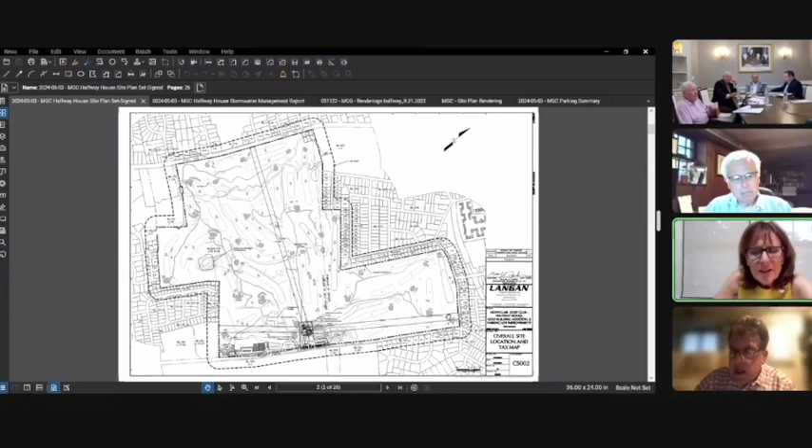Ms. McGovern, you have to label this? I'm sorry, Ms. McGovern, you have to label this? Well, if it's with the application package, no, but I think each page that you're referring to, like this one, it's very hard to read. It's small on my computer. You said this was from the previous site. Yeah, just please refer to the page number on the site plan. So this is CS002. As you're testifying to each page, reference the page number.

Sure, this is drawing CS 002, what we call the overall site location and tax map. Just to get some bearings, Prospect Avenue is on the bottom of the page. All the improvements are along Prospect Avenue. The existing clubhouse is in this area. The new pool is further down to the south, nearest the Residence Inn. The existing pool is located next to the clubhouse.

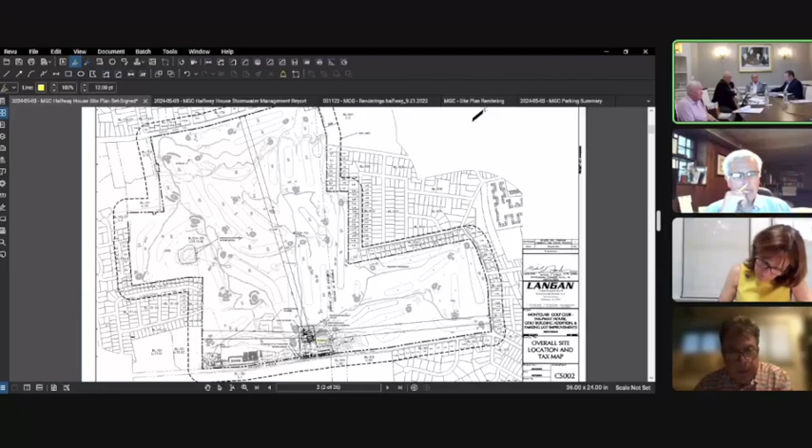So all the work is here, but I'm going to move on to our overall site plan, which is drawing CS 101 with the same revision date. This is a zoom in, more of the same area, but as you see, the clubhouse is here. The existing pool, just for perspective, is approximately where that yellow box is. And we are, I'm going to go, I apologize.

I'm going to go to a zoomed in site plan to make it a little clearer. This is drawing CS 102, showing the improvements in the area of the existing pool.

The existing pool is located here, and there's an existing building that's located here and includes the pro shop here. This part of the building will be demolished. It currently houses a locker room and snack bar that are no longer in use. The pool is currently filled in for safety reasons, but it will be demolished as part of the project.

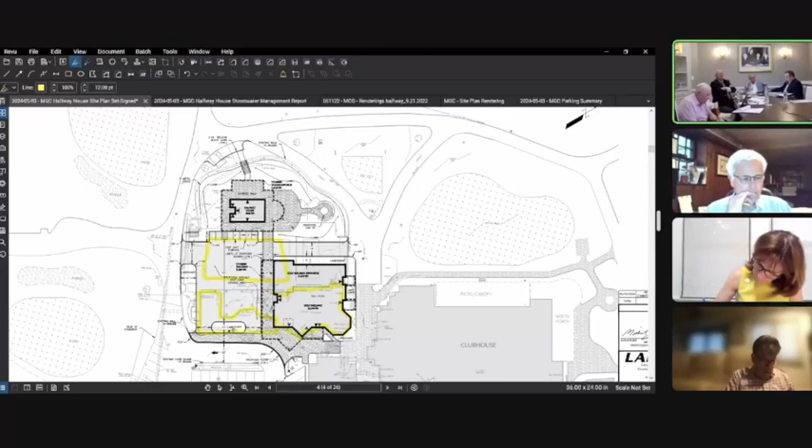The project in this area includes expanding the pro shop, the golf building, which houses the pro shop, golf bag storage, the starter area, and in the future will hold two hitting bays or golf simulators. Additionally, they're proposing to build a golf cart staging area. Currently, golf carts are staged within the drive aisles in front of this existing building and to the side of the building. By eliminating this and building a golf cart staging area, it allows better free flow of traffic and drop off within the parking lot as is intended.

The halfway house, which is being proposed here, will house a kitchen and bathrooms for use by golfers in the middle of the round and after the round. The remaining work we're proposing is within the parking lot.

Along Prospect Avenue, we're looking to maintain the three existing driveways while expanding the furthest south driveway, which is currently one in and one out. We are looking to add dedicated left turn and right turn lanes. As we do that, we will also look to eliminate some parking that's currently immediately adjacent to that entrance to allow for better flow into the golf facility and also south towards the pool.

The improvements will also include curbing along Prospect Avenue with the county, and a 3-foot high decorative wall for aesthetic purposes. As we eliminate some parking here, we're proposing 15 new parking spaces here. There'll be a net 4 additional parking spaces. We currently have 385 parking spaces on site, and we're proposing 389.

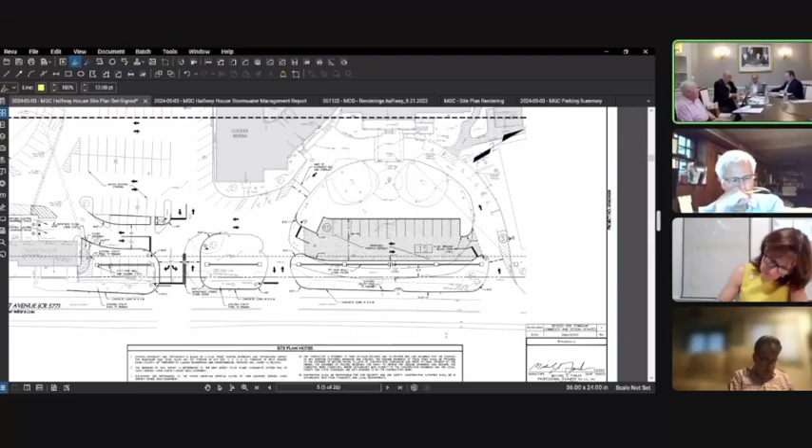There will be no changes to the ADA parking on site; existing spaces are to remain. There's one existing EV parking space, and we're proposing to add a second. Generally, that's the extent of our site improvements.

Tim, before you move on, you might want to go back to the prior plan. I don't know if you have this dimensioned on the plan, but if you could at least give the board an approximation as to how far the existing golf building is from Prospect Avenue. That's probably best shown on our overall site plan.

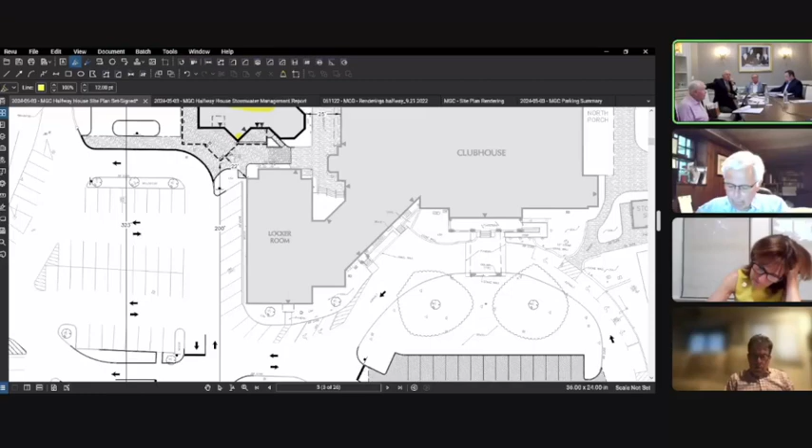The existing building is approximately 210 feet from Prospect Avenue. The new building, with an overhang here, will be 200 feet from Prospect Avenue. And the halfway house will be 323 feet from Prospect Avenue. Okay, thank you.

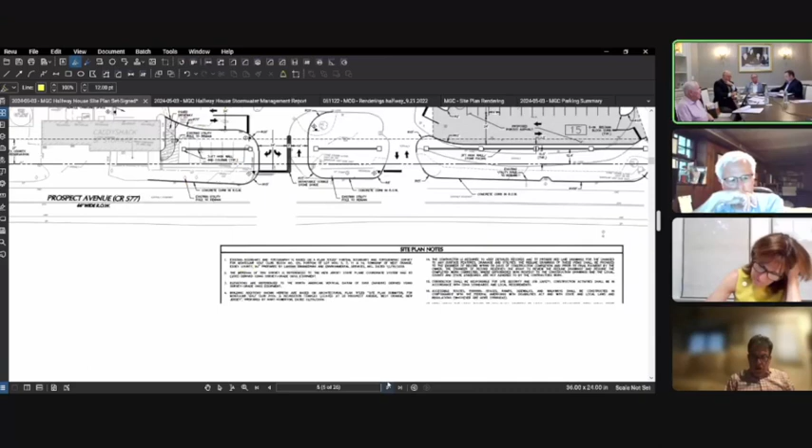The remaining improvements have to do with the required utilities, grading, drainage, and lighting improvements. This is our overall grading and drainage plan, drawing CG 101.

Grades are generally to remain as existing. The project disturbs greater than an acre, so it is a major development by stormwater management rules and by your code. To address that, we are providing underground detention ultimately within the golf course area, and porous pavement at the front within the new parking spaces. The porous pavement discharges to the county system, which ultimately discharges into Eagle Rock Reservation.

The other area, the area to the golf course, discharges to an internal drainage system that ultimately discharges to Peckman River, greater than 2,000 feet away.

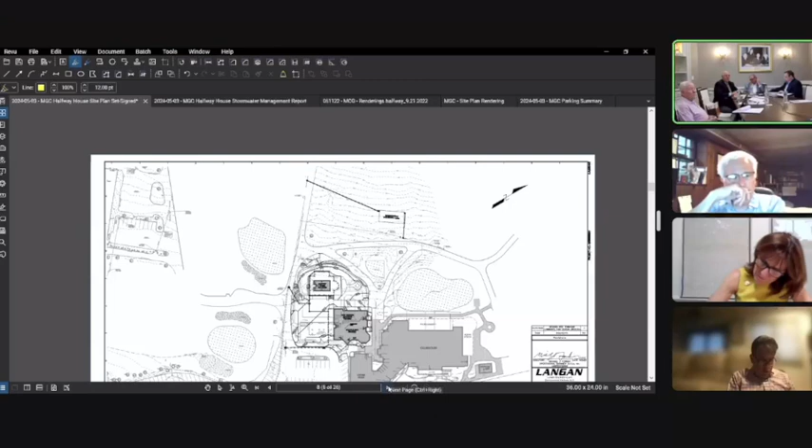Moving to the utilities, existing sanitary is provided by reuse of an existing sanitary lateral that previously served the pool facility. Gas will be provided by the existing gas service that was also to the pool facility. Electric, power, and communications are provided through the existing golf course building service.

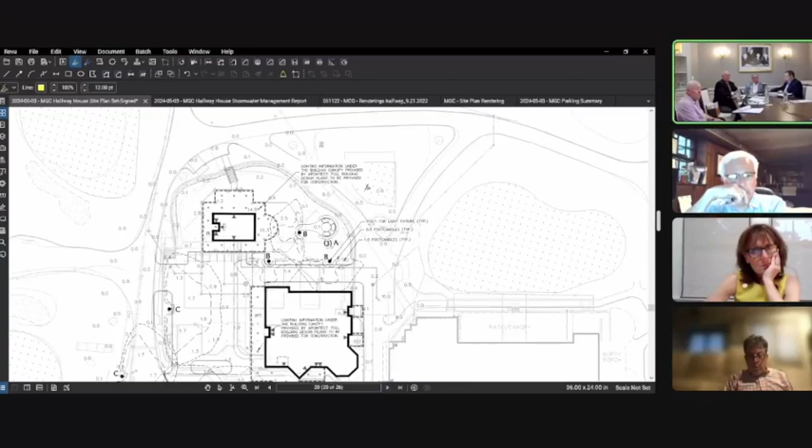For the site improvements, we're proposing new lighting within the project area, where it's currently lit by floodlights and some existing building lighting. The points here depict new pole lighting. This is drawing LL 101, the overall lighting plan. There'll be new decorative pole-mounted fixtures matching what was previously installed for the pool facility a few years ago. There will also be some decorative lighting on top of the walls at the entrances along Prospect Avenue.

And then additionally, the last set of improvements we're proposing have to do with landscaping, and that's shown on our landscape plans. This is the overall landscape plan, LP 101.

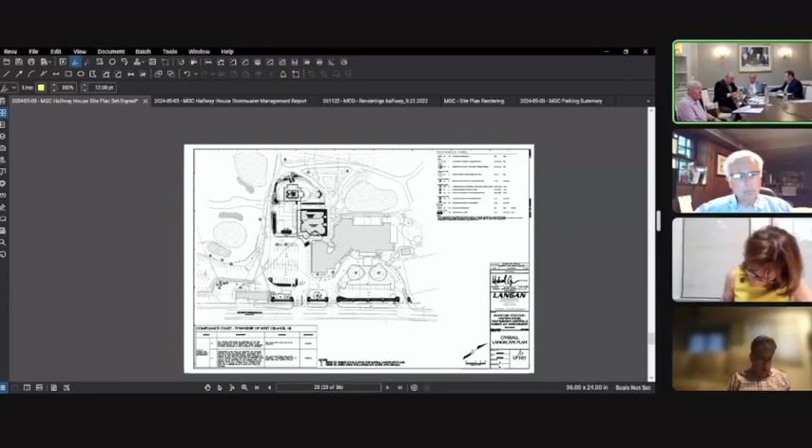As you can see, we're proposing landscaping along the decorative wall on Prospect Avenue. There's several trees and other low landscaping around the proposed buildings.

As part of the project, we will be removing one tree as requested in the engineer's letter. It's an ash tree that's in poor health, located on this island. Other than that, there are no other tree removals proposed as part of this project.

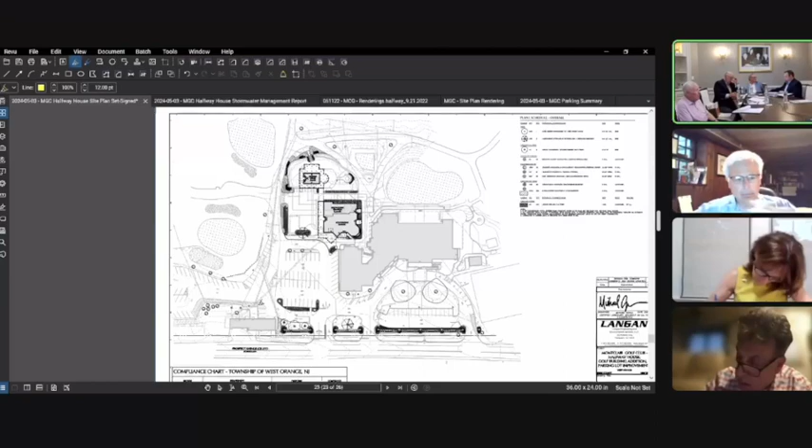Looking back at our overall site plan, CS 101, there was a question about stacking and cars interfering with traffic flow in the area of the entrance and exit. I just want to point out that this is an existing parking lot that has been functioning this way for greater than 50 years, closer probably to 100 years with the driveways in place. What we're doing is improving what currently exists. These are generally private members using this facility and used to the traffic as is.

As I said, there's existing parking in this area, and existing parking in this area, and currently only one way in and out. So as it is, cars do just line up here and block traffic. By eliminating the parking here and here, there's room for cars to wait here and wait at this intersection, and also room for right turns to be made while left turns are waiting.

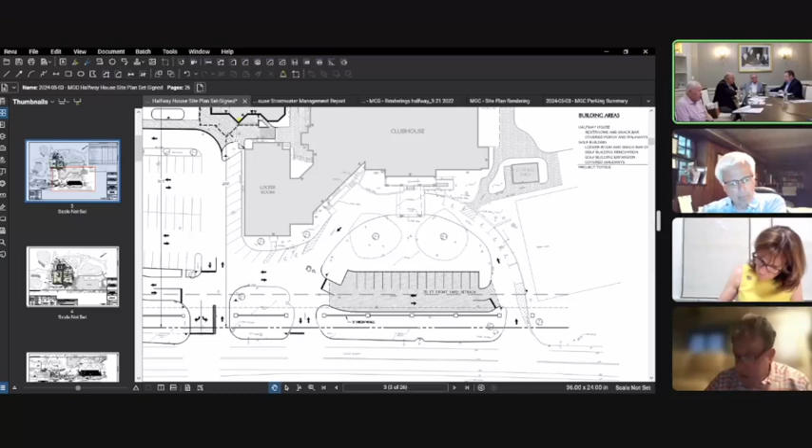Montclair Golf Club, to my knowledge, has always been a private golf club. Is that right? Correct. Is there any intention to change that going forward? Not to my knowledge. The club will continue to operate as a private club and not be open to the general public, but simply to members and their guests. Is that right? Correct, I believe no change in current use. I just mentioned that because there was a comment in one of the review letters we received.

I think my final question was, did you have an opportunity to review the updated comment letter from John Hess, the board's engineer, dated June 4, 2024? Yes, I have. Is there anything in that report you'd like to discuss, or are you able to commit to complying with all of his comments? I believe we can comply with all his comments, or come to an understanding or agreement if there is a discrepancy. All right, thank you, that's all I have, Mr. Chairman.

Do any members of the board have any questions? Vice Chairman Garino. Thank you, Mr. Chairman. I have a question for Mr. Derrick. Are you qualified to give testimony or answer a question concerning traffic and traffic evaluation? Very limited. Well then, just from your drawings and everything else, I have a concern about the privacy walls.

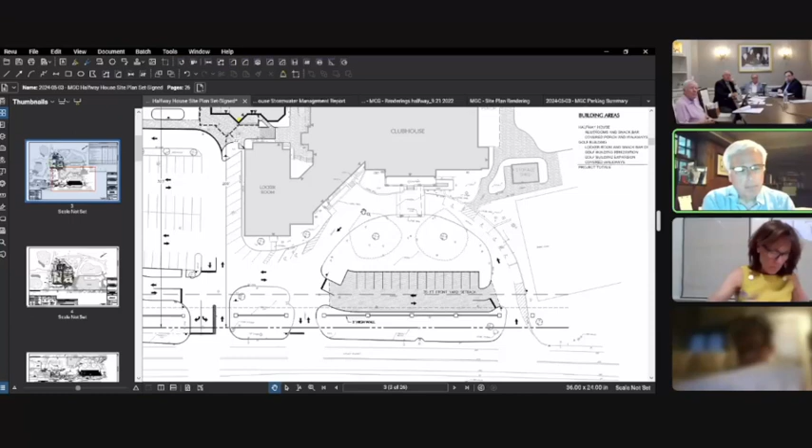Has any analysis been done on any increased inability for people exiting the property to see traffic coming across Prospect? As part of our plan set, we have a drawing submitted, CS104, the sight triangles plan. It demonstrates the visibility for traffic exiting from the driveways.

And just to point out that the walls are well behind the stop bars, so they're not interfering with any views. Okay, and the lighting that you propose, has that been analyzed to figure will it make any glaring on the drivers coming out of the property that would impede their seeing ongoing traffic on Prospect?

I'm sorry, the proposed light, the lighting that you say you're going to put on top of the walls, are they all LED? I won't say house side shields, but they're directional and won't be directed towards the road. And our light level plan demonstrates the light levels within the area of the project.

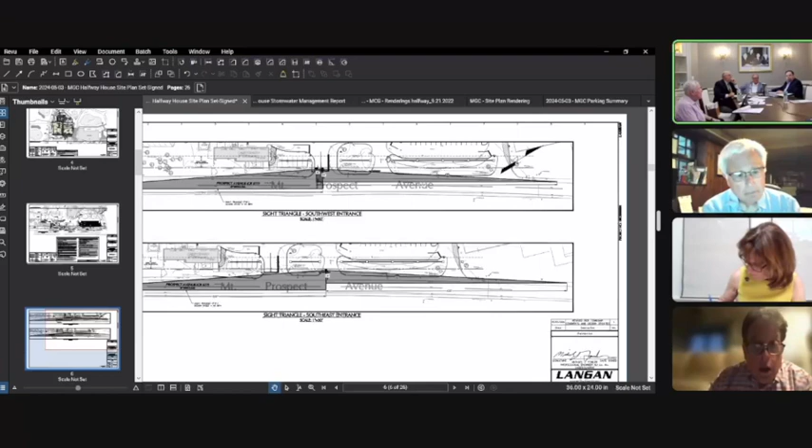Okay, and I need to ask, was a traffic engineer utilized to look at this and give their expert opinion as to the traffic and the flow? No, not specifically. Not changing, no. We're maintaining what's there with some improvements.

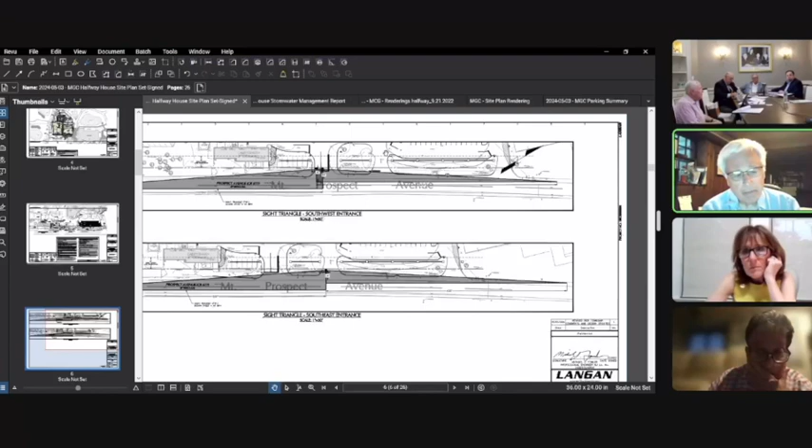And my last question, sir, is there any intention to put any sidewalks in front of the property here that do not exist now? Would there be any intention of adding, repairing, or putting in additional sidewalks? Currently that's not part of this project, and I believe that would be something the county would have to propose. But that said, there's nothing in the area of the project to connect to, so no, we were not proposing any new sidewalks.

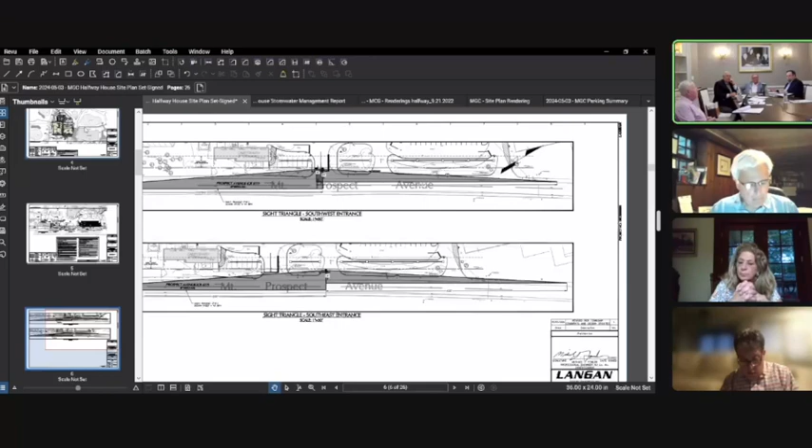I don't know if I can speak to hazardous trees. As the engineer, I can't really speak to it, but from past hearings, I understand if there's any hazardous trees on the golf club property, the golf club would typically be willing to address the matter.

You know what? Can I stop you? Who's talking? Is it Mr. Tremolak or is it a witness that hasn't been sworn in yet? No, it's Mr. Derrick. Okay, because I'm having a hard time. I see a group of people and then I don't see it because of this screen sharing. I can't see him. I apologize. Okay, that's alright. Because you're on mute on my screen, but yet you're in that room with them. Is that what's going on? Correct. Okay, got it. Sorry, I apologize for the confusion.

But thank you for answering the question about the hazardous trees. So you may have to bring that to your attention.

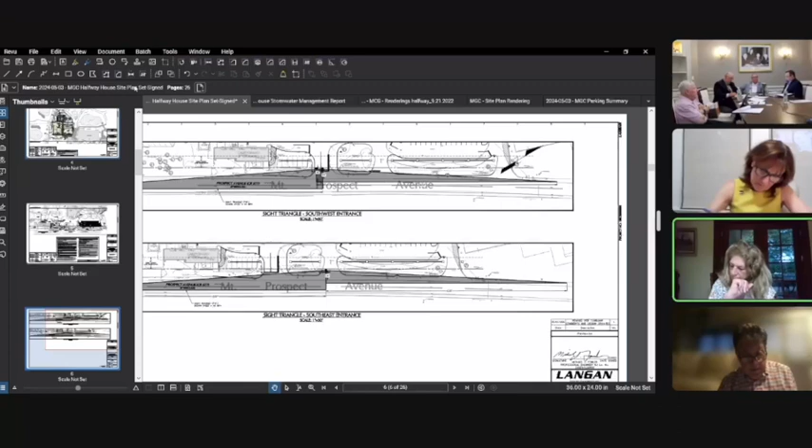Any other questions, Mayor? No, sir. Thank you. Mr. Klein? I was part of the SPRAB, so I think they addressed my comment on the entrance because they're reconfiguring it slightly, but I think they've got enough stop lines and stop signs to control the traffic at that T intersection. It's actually more like a four-way intersection. So I'm okay with that.

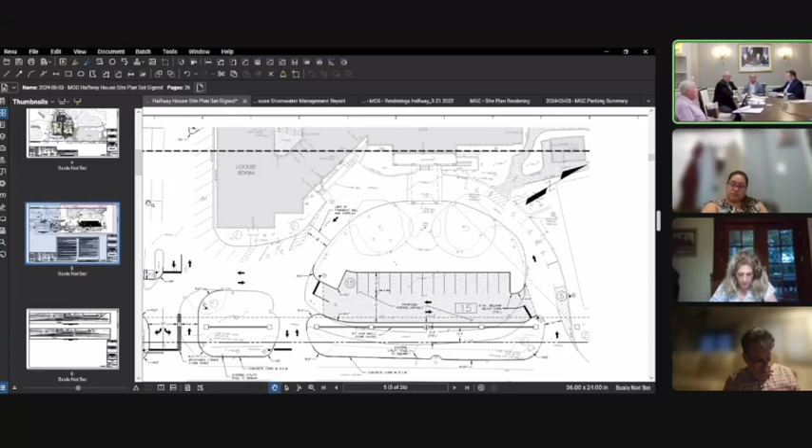The existing ADA parking for this area is located along the turnaround in this location, and the entrance to the clubhouse is right here underneath the porte cochere. There's an ADA ramp that was installed roughly 10, 15 years ago as part of another site plan application that people can use. Additionally, there's another ADA path out to some of the patio areas that can also be accessed from these ADA parking spaces. The two ADA parking spaces here, users would walk up the driveway to use the same ADA ramp. People parking here would likely walk out and, using the drive aisles, walk up to the clubhouse or to the golf areas, similar to how all the rest of the parking facility is used.

Have there been any issues with those who've been using the handicap accessible spaces? The concern I have is a bit with people walking in the drive aisles, especially the access drive. Have there been any complaints or issues with that to your knowledge? Nothing that's been brought to my attention.

Okay, thank you. I have one question about stormwater management as well. Did you complete a geotechnical report as part of, I think you said you're proposing, it says this on the plan, the porous asphalt out front? We've begun an investigation, and we'll provide the results to the town shortly, and if there's any changes required, we will make them. But the initial results we have fall in line with the assumptions we've made. Okay, thank you, those are the only questions I had.

I have a question. Would it change the plan drastically if you put a sidewalk along Prospect Avenue? Would that change the places where you have the new parking spots? No, not that I believe so. The property line is here. The county does have a reservation line, which is the dash line, but they've allowed us to do work within that reservation line. If they did need to put a sidewalk in, there is room to put a sidewalk in.

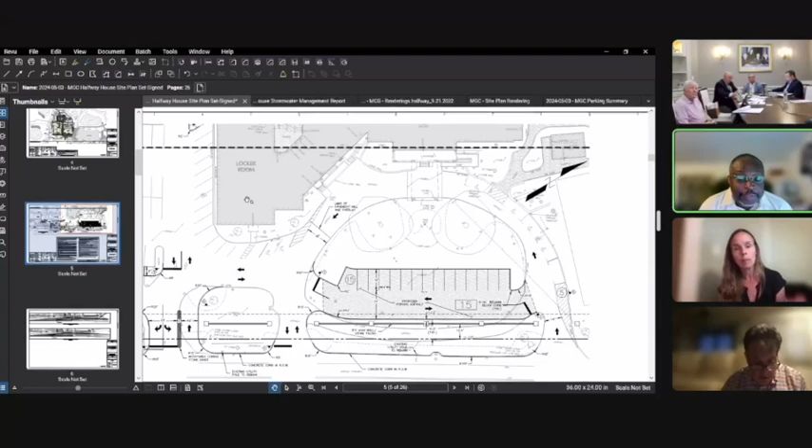Okay, thank you. Mr. Hazel, do you have any questions? Yes, I do. You mentioned the circulation on the site and went through the different stop areas, and so that would help to prevent excessive stacking. Were you able to take a look at my report and the consideration I mentioned, and would you consider it in terms of the circulation on the site?

I did see your report. The hesitation we have for making this drive aisle a one-way is that we're trying not to introduce additional traffic underneath the porte cochere where people are being dropped off typically. So if someone's parking here, we want to give them the option to get out without having to go underneath the porte cochere. That was the consideration we made.

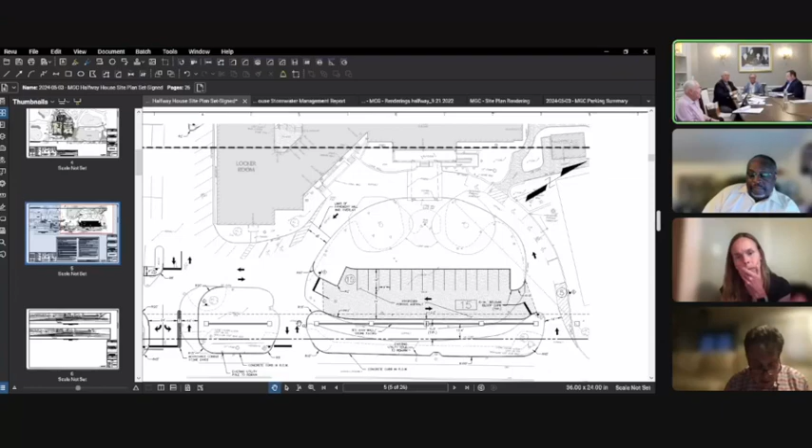And then additionally, I think you had some comments about this middle driveway here. Yeah, typically the majority of the traffic comes through this driveway, the southernmost driveway. This driveway is typically used for people who are dining, leaving valet parking, but also more critically for the club. The service area and food deliveries are made at this point here, so all the food service trucks come in and use this driveway as is. So that's what we're looking to maintain, the current driveway, although it's not something standard you typically see. This is how the club functions today, and will need to continue to function in the future.

Yeah, and I do appreciate that this has been in existence for quite some time, and it's been, if it's not broken, don't fix it. But in my opinion, you're making a substantial change by introducing these 15 spaces here, and I was a bit concerned that especially with the ingress at that center spot, that center ingress point, you may have created an opportunity for conflict with cars coming off the new 15 space area as well as cars coming from the circular driveway. That was my concern. Not so much any cars exiting from that central area, but the cars coming in, so that was my concern.

Sorry? No, nothing, sorry. All right. The other question I had was, I'm familiar with some of the species of landscaping proposed on the frontage along the wall, the line of the wall proposed in the front. Generally, is the intent that the foliage put there will cover the wall, get to a height above the wall? What are you looking at in terms of when the vegetation is fully grown? The intention is for it just to be low landscaping, not to cover the wall. Okay, so it would not even get as high as the 3 foot height. No.

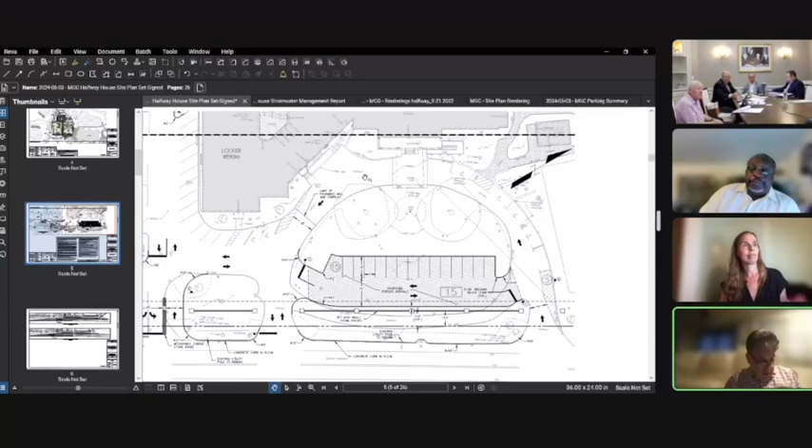Mr. Hess, do you have any questions for Mr. Derrick? I have no questions, Mr. Chairman. Thank you. Do any members of the public have any questions for the testimony that was just provided? Please raise your hand and be identified. Mr. Chairman, someone's hand was up and then it went back down, so we'll give it another shot. Any member of the public who has questions, please raise your hand.

Yes, Mr. DiArco, welcome to the meeting. Can you hear us? Please state your name and address for the record. Yes, Joseph DiArco, Township Manager of Verona. I have a question on the stormwater runoff drainage. Mr. Derrick said it doesn't require a DEP review or approval. Obviously, Verona is always concerned about runoff from the golf course.

Did you hear that, Mr. Derrick? I could hear that, I apologize. Was there a question? Mr. DiArco, would you put that in the form of a question? Yes, you indicated the DEP doesn't have to review the stormwater runoff management plan for the golf course in this project, is that correct? Correct.

And are those part of the plans that can be reviewed by Verona? We've submitted all our plans and calculations to the town for review. Mr. Hess has viewed them as a major development. We're subject to the same New Jersey State Stormwater Management rules that were in place at the time of submission, and are similar to the rules in the town code. So in that sense, we're subject to the same things. Okay, thank you, thank you Mr. DiArco.

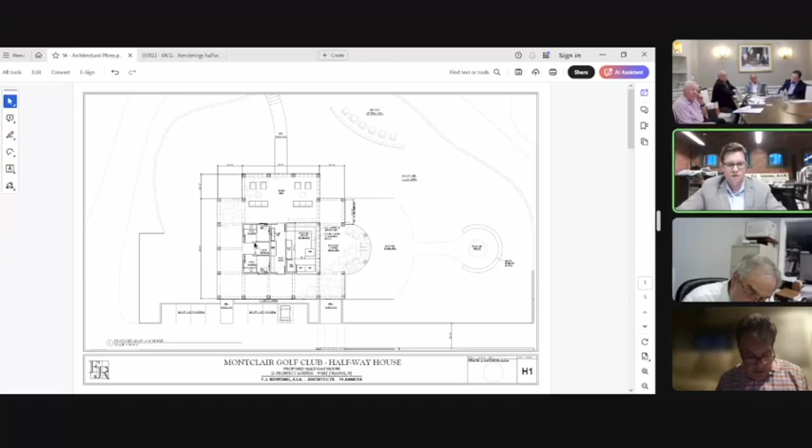I don't know if you can see my screen. I have drawing H1 up, and I'll be testifying to the two structures discussed in this application. This current structure is the halfway house, located between the 9th hole on this side and the 10th hole on this side, and as Mr. Tremulak said earlier in testimony, it is an 840 square foot building. That includes all the enclosed walls on the interior of this building. So any enclosed wall within this portion of the building is within that 840 square feet.

There is 1,780 square feet of covered porch for roof cover for people dining and using the halfway house. So the total under roof of this structure is 2,600 square feet of a single story structure. There's no access above, it's a single story structure.

The halfway house includes accessible ADA bathrooms, a janitor's closet which you can see in the middle, a prep kitchen for the serving area. There's a serving area and bar open to the covered porch area, and it services all the members, includes a pizza oven, grill, snacks, and refreshments for your halfway house and after-golf needs. This is a completely open kitchen, but when service is over, there are shutter doors that roll down and secure this entire part of the building.

The building, as we've drawn it - I'm going to skip to the next page, it is page H2. You can see elevations of the halfway house. We tried to stay consistent with the other accessory buildings on the club campus, and we tried to stay with the same architectural materials and language of the campus as well. So the main materials of the building are composite clapboard siding and shingle siding. We would use an architectural roof shingle, which would be a slate-like shingle that would also match similar roof types on the campus.

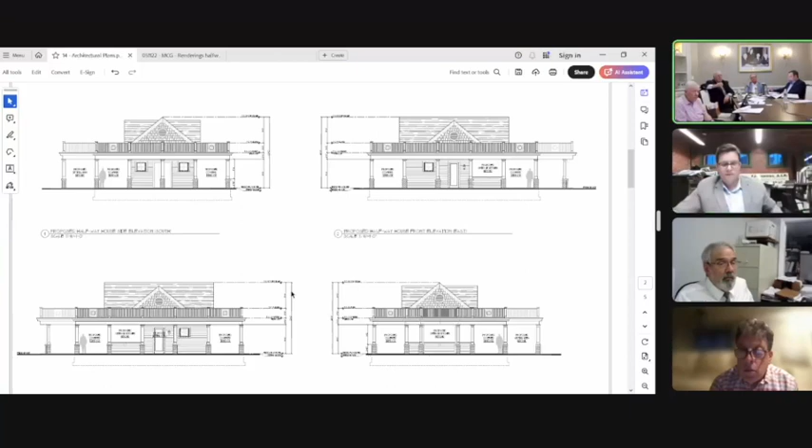So the 22-foot height was due to the need to have mechanical systems in the upper floor. Sorry, yes, let me correct myself - 22 foot height to the ridge. It's kind of hard to read. Your testimony is that you needed the additional height in order to have room for the mechanical systems on the upper floor? That's correct, yes.

Is the height of that building relatively consistent with the height of the other accessory buildings on the golf club property? Yes, the adjacent buildings in the clubhouse, it is consistent with the heights and a bit shorter than a few areas. You want to continue with the plans? I guess you've got the building expansion next? Right, so the building expansion is next. That is the pro shop.

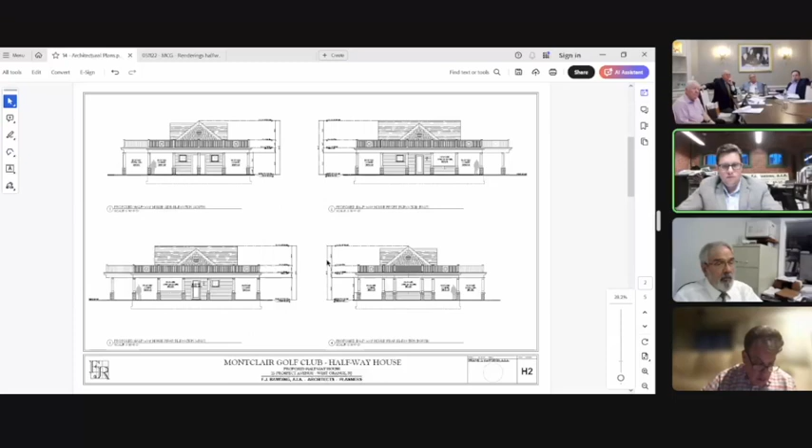So for the pro shop, let me get square footages for you. These are ballpark numbers, I can provide exact numbers if you'd like. The existing square footage is 4,800 square feet. We are removing 1,600 square feet of space from the left side with the pool accessory rooms getting removed, leaving 3,200 square feet. Our intent in the back portion is to add 1,730 square feet to expand the pro shop and simulator area, so the net add of space is about 130 square feet.

So we're not making the building incredibly larger, just kind of reallocating space. The building houses the existing pro shop, which we would expand, the starter where you come and get your starting time, the bag storage area, some accessory buildings to the bag storage, and a new golf simulator area with two simulators and a lounge, and offices in the back to support the pro shop.

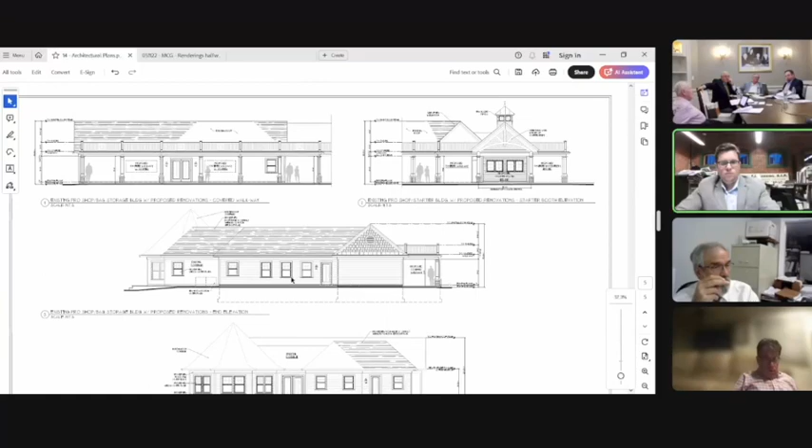The final elevation on the page, page number 4, this is a bit of a mix of both new and existing - this is the existing pro shop. If you move back to the plan, you can see this octagon structure; we're looking now at this view here. You can see the two entries into the pro shop - here's the new entry, and this is the new addition portion. You can see we are keeping with the existing roof lines and working with the existing building to not increase the roof height anywhere on this building.

What is the height of the building addition, and how does it compare to the height of the existing golf building? The existing building has a few different roof pitches. The existing roof median peak, if you can see my cursor, is 20'2". This peak is 24'8" for the octagon structure. And I don't have this one listed, but it's about a foot shorter, 1.5 shorter here.

On the other side, as I mentioned, there are multiple roof peaks on this building. On the new addition side, the highest peak of the ridge is 19'8".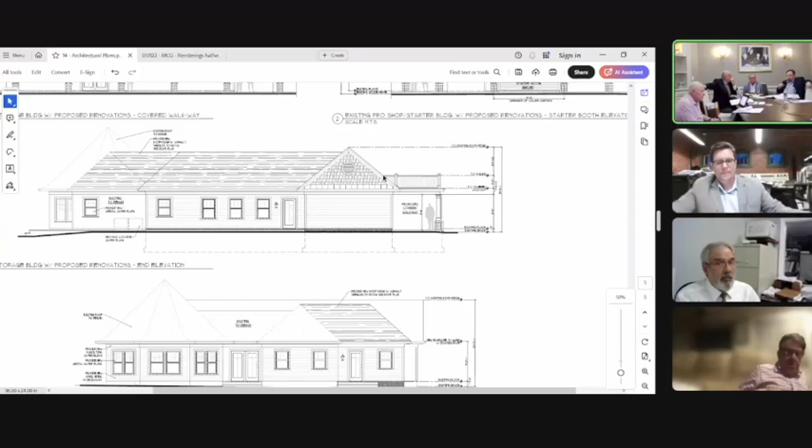Finally, moving on to our filed renderings, this will give a clear picture of everything I just spoke about. I am on page R1, viewing both buildings from the parking lot. This is the golf cart staging area and where the existing building was. This is the new portico for the starter, and this is the covered entry for golf staging and the entrance to the golf bag room.

In the distance, you can see the halfway house and the covered porch beyond. You can see the peaks here. We're utilizing these existing ridges and continuing them around.

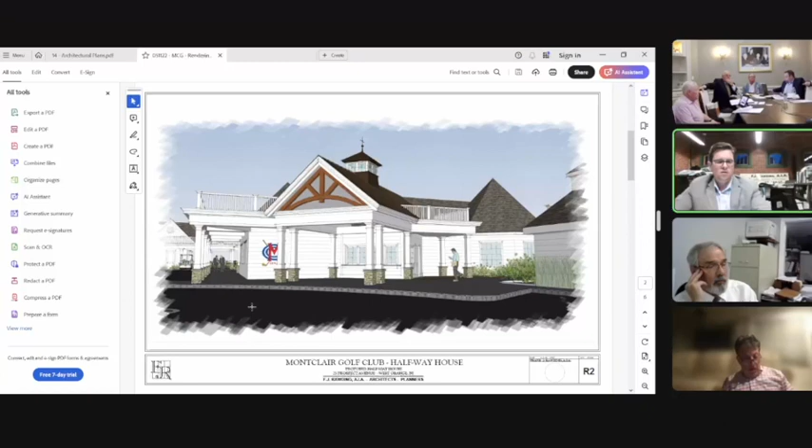This is just an enlarged view of that front portico. You can see we included some decorative elements at the point of arrival. When you get to the golf course, the starter booth is beyond, and the pro shop - you can access through a pathway here and around, and you can access the halfway house through this covered porch.

Moving further into the golf cart storage areas, you can see this is the covered staging area with the scoring within it, and an enlarged view of the halfway house.

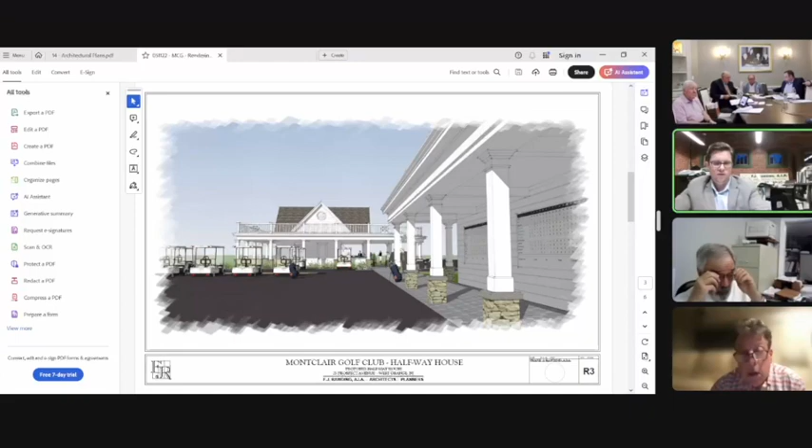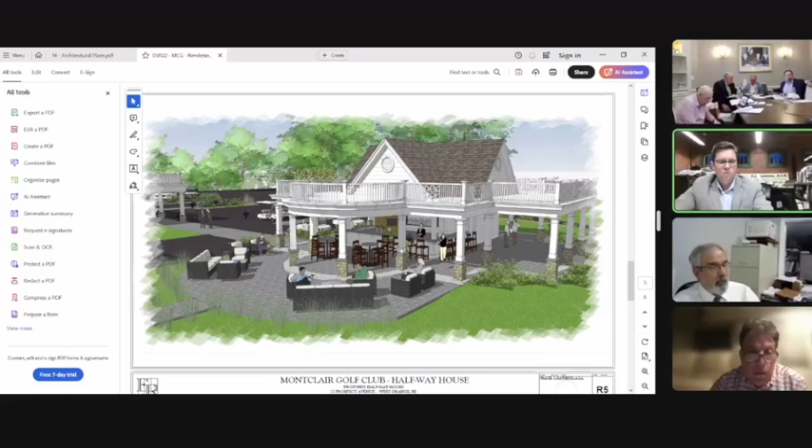Now page R5, this is a view from the rear grass area, a bit of an aerial view. You can see the parking lot in the distance with cars, and the dining area, and the open kitchen below, and this small portion of the golf clubhouse.

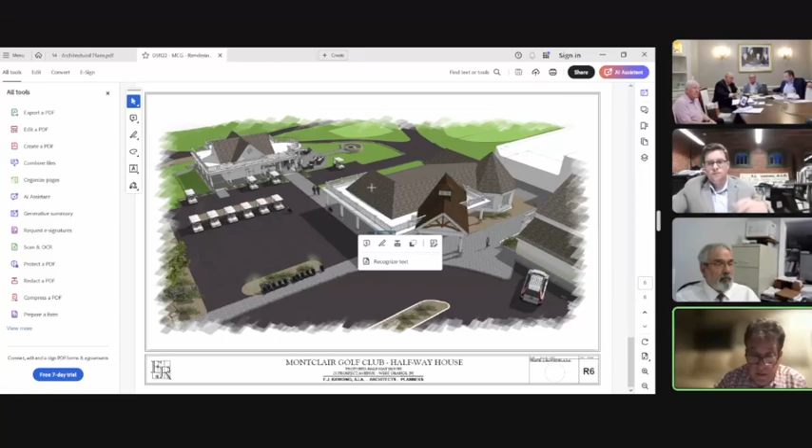Two comments, two questions. Mr. Roding, I think this is a very stately and consistent architectural design for the halfway house. I'm curious if you have a word synonymous to halfway house that we could use. This has come up before. In your experience, is there a different word we can use? Yeah, there's refreshment center or something like that. That's good, thank you for that.

I have no problem with the proposed height for the pro shop and simulator areas, but I didn't see where you said you were taking 1,600 square feet away from the pool accessory use. Is that being relocated somewhere else? I'm sorry, I didn't.

Mr. Derek testified to the portion of the building being demolished. If I could share my screen. The existing pool is currently right here, and the pool portion of the building was right here, which we're demolishing. So when I said we're reallocating space, we're demolishing 1,600 square feet and adding 1,730. We're moving a portion of the square footage to the back of the building, right at that space.

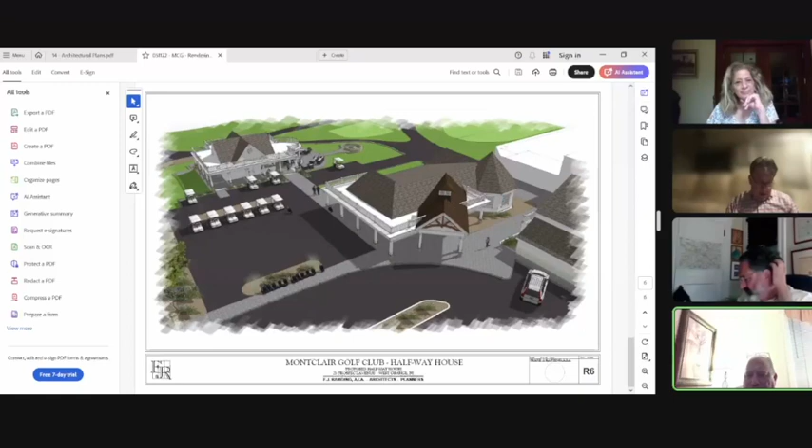Yeah, Mr. Chairman, my typical ones regarding the mechanicals. You mentioned the halfway house, or refreshment center, whatever we're calling it tonight. What's going to be up in those roof areas? So the HVAC units will be up there, and the air ventilation will be up there. I was looking at the plans previously, so there's going to be grease, heat, and vapors there. Between the pizza oven, the grill, and everything else, there will be suppression systems, hoods, and all that.

Yep, that's correct. Since that's a standalone structure, far away from the building, this board has been trying for public safety to request defibrillators. This isn't as far out as some other places, but since it's far enough away, I think that's something we'd suggest or request as a condition for that unit. What about communication? Will there be telephones? We've been asking for 911 prompt wireless systems when there's distance like that, but I don't know if this warrants it since it's close to the clubhouse.

Well, yeah, they will have a phone system in there. Within the kitchen, staff members will have their own connected phone to the main clubhouse, and they'll be able to call out from there. Okay.

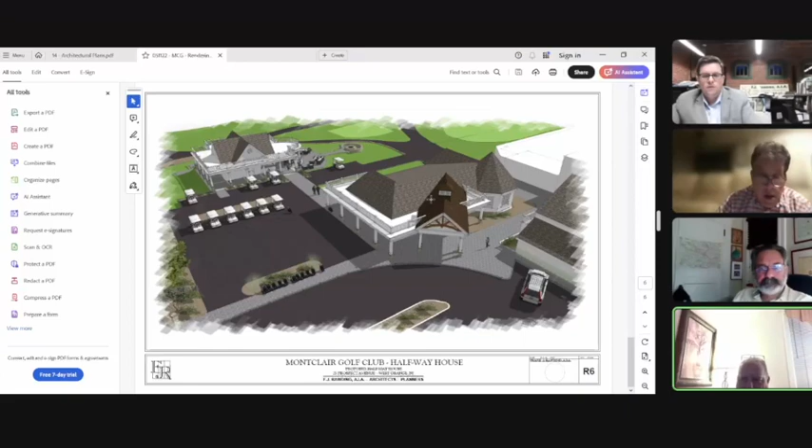That's my question for that building. The other building, I'm still going to ask the same thing. This is an existing building you're adding to. Is this subject to retrofit under the fire code? I believe so, yes. So it'll be brought up to whatever requirements are needed, whether alarm, suppression, anything of that nature. Correct, right. Okay, so fire strobes and all will be brought up to code.

And trusses in both buildings, I'm assuming? I believe this one is stick built. The new building, I'm not sure, we haven't decided the structure yet. Okay, just for the record, if it is trussed, make sure that gets included with whatever requirements are needed with placards and all that. No suppression systems as far as water, right? No sprinklers or anything like that? Correct, no, I don't believe so.

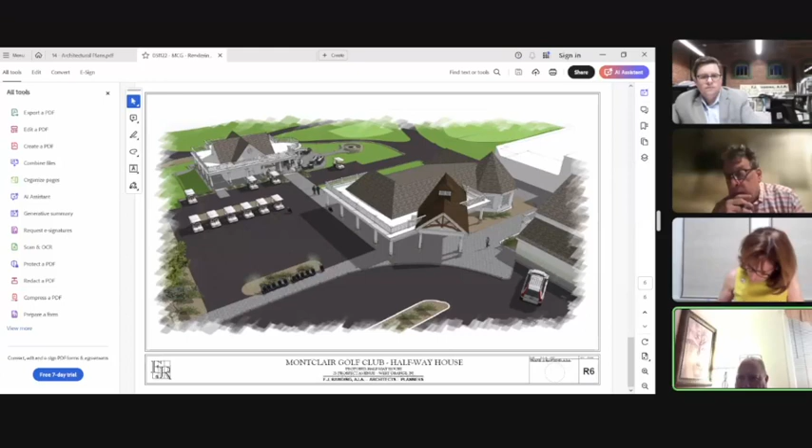Okay, alright. And will there be any areas that need fire lane striping anywhere? I would defer to Mr. Derek on that one, I don't believe so, but I'll defer to him. Okay, I think if it's an area that needs it, we're looking for decor, but we also have to look at safety, so whatever we have to put in there for that.

I think I've asked my questions. Thank you. I have a question on your questions. Are you suggesting that it's a condition that they have an AED and a 911 wireless system?

No, I'm not going to suggest a wireless system. I'm going to make it a requirement for at least the halfway house to have an AED in there because that's far enough away. I'll leave it up to the board if they want to throw one in the golf house. If they're buying one, they can buy two. And then condition, I think if there's required fire lane striping, then that's got to be put in, and we'll ask their expert about that.

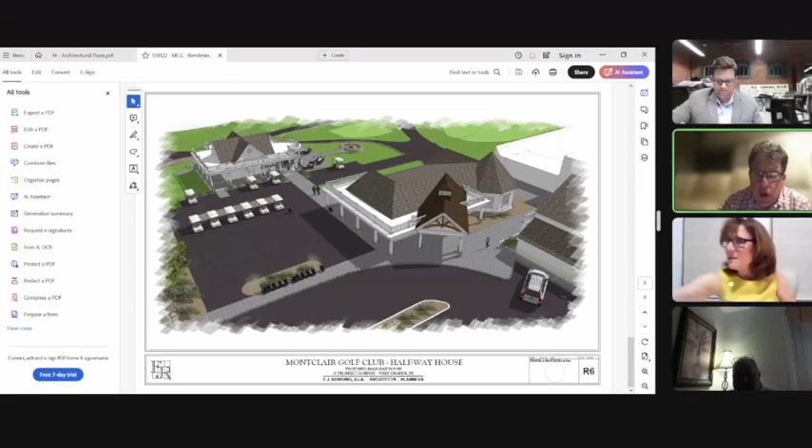Other than that, I have no more questions. Thank you, Mr. Smeraldo. Mr. Cardoza? None at this time, Mr. Chairman. Thank you, Mr. Cardoza. Ms. Capfer? I don't have any questions at this time. Thank you, Ms. Capfer. Mr. Hazel? No questions at this time. Thank you, Mr. Hazel. Mr. Hess? I have no questions, Mr. Chairman. Thank you, Mr. Hess.

Do any members of the public have any questions for Mr. Rorting on his presentation? Please raise your hand and be identified. Mr. Chairman, there are no hands raised, and please be advised that Council President Bill Rutherford has entered the meeting. Let the record show Council President Rutherford entered during the meeting.

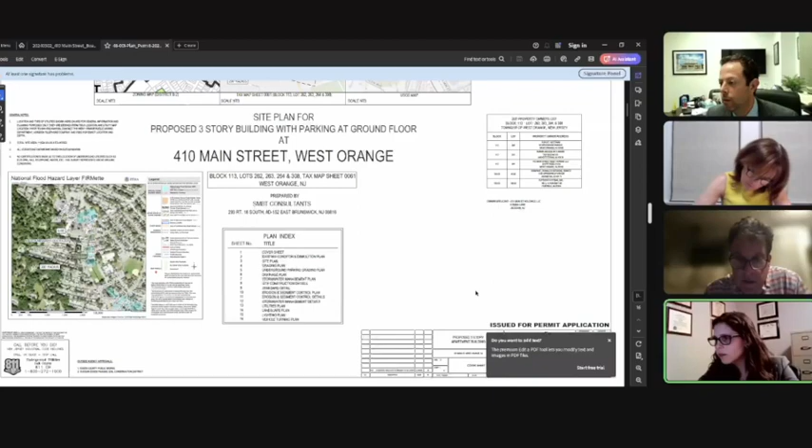As Mr. Tavala said, I am showing the civil drawing to orient us toward the site. This is the cover page of the civil plan, sheet number P1.

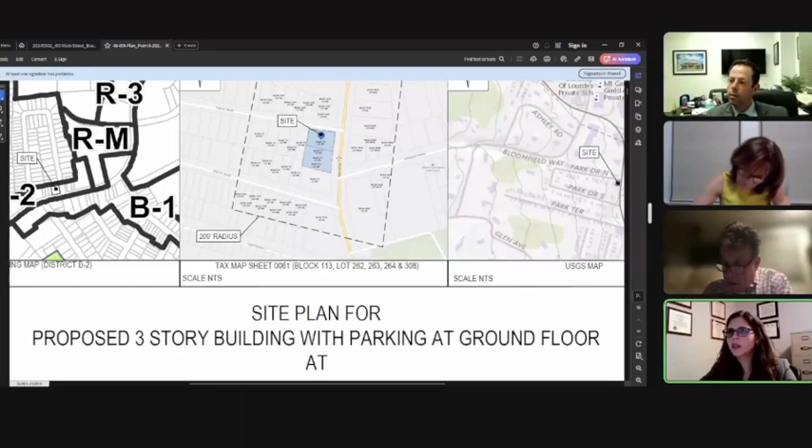We are in the B2 zone, along Main Street at the corner of Park Drive North, as shown on this map. The tract is 11,936 square feet, approximately 134 linear feet along Main Street and approximately 85 linear feet along Park Drive North. It comprises these 3 properties shown here.

The site is surrounded currently by traditional commercial properties along Main Street to the north, and these buildings abut their property lines on Main Street. To the south there are a few townhouses, followed by a Dunkin' Donuts and a gas station across the street. The subject property contained a 2.5-story frame building, but these improvements have been demolished.

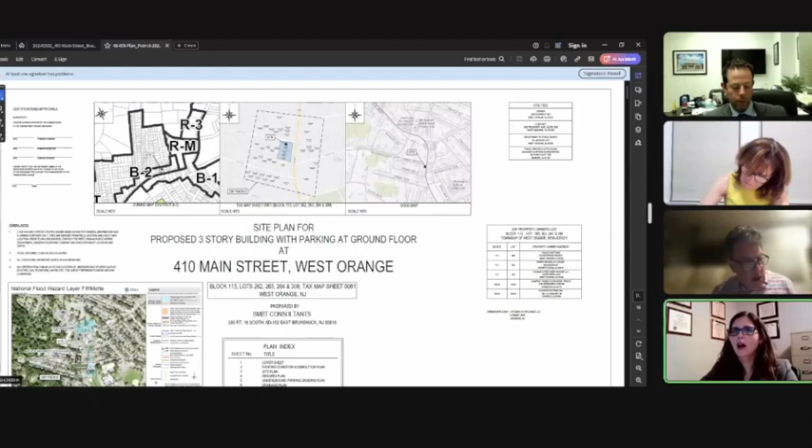The next thing I'd like to acknowledge is the grade changes. There's a substantial grade change going from Main Street up Park Drive North, about 15 feet vertically. There's currently a retaining wall along the property line on Main Street and partially along Park Drive North, and this will be largely eliminated by our design.

I'm going to switch over to the architectural drawings. I have 4 architectural drawings that I'm going to share. The first is a rendering.

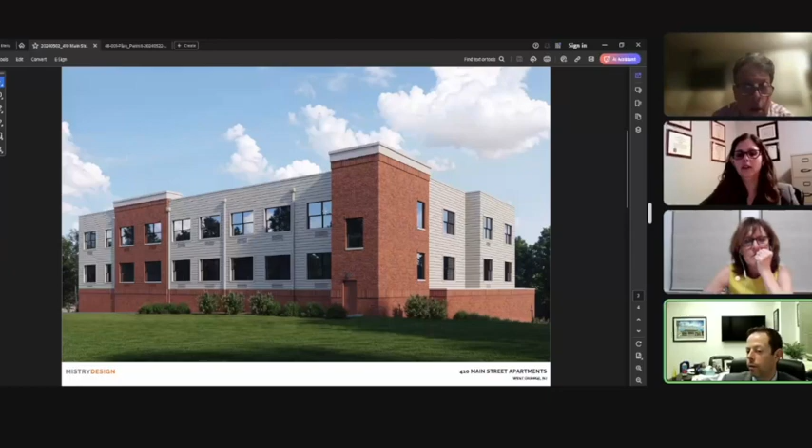Due to the existing site grading, the building is shorter in the rear, and the parking level is recessed 8 feet in this area. From this view, the building reads more as a 2-story building, and the materials are consistent with the front and wrap around. The parking area is not visible from the public and is completely screened.

Onto sheet A2.01. This sheet shows the first floor plan, typical upper floor plan, roof plan, as well as the square footage and unit count chart. The applicant is proposing a 25,700 square foot building, with 8,800 square feet on the ground floor and slightly smaller on each floor above. There are 12 units and 13 parking spaces, with one 900 square foot commercial space.

On the first floor, ground floor, we have the commercial space, trash termination room, the lobby space with a lower lobby and an upper lobby that connects to the interior parking garage, as well as stairs for circulation and utility space, which also reaches storage that will be used for management storage, not tenant use. The parking will be described in more detail by traffic and civil.

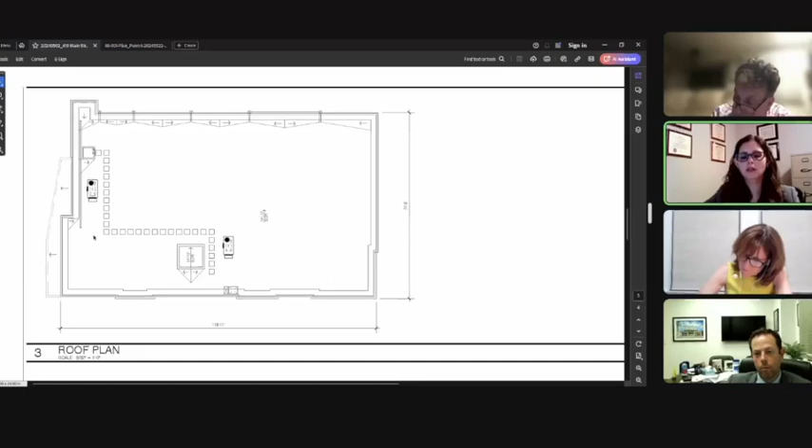One of the questions was about deliveries. Deliveries will take place on the street level on Main Street. I know there's a bus stop—the traffic engineer will address exactly how that works—but generally there is parking on Main Street, and deliveries can occur there as long as they are not in the public transit bus stop. There will be a key fob system as well as cameras, and mail and packages will come in through the lobby, consistent with other commercial properties along Main Street.

Each residential floor has a trash chute, and trash will be brought to that chute from each unit, as well as recycle cans. The building manager will collect the recycling and bring it down on a regular schedule to the trash termination room for later collection. The trash and recycle will be picked up along Main Street by a private hauler; the attendant will roll out the dumpsters for collection. Once the refuse is collected, the vehicle will continue forward along Main Street, with no turnaround, and will not go up Park Drive North. The commercial space and residential share the trash room.

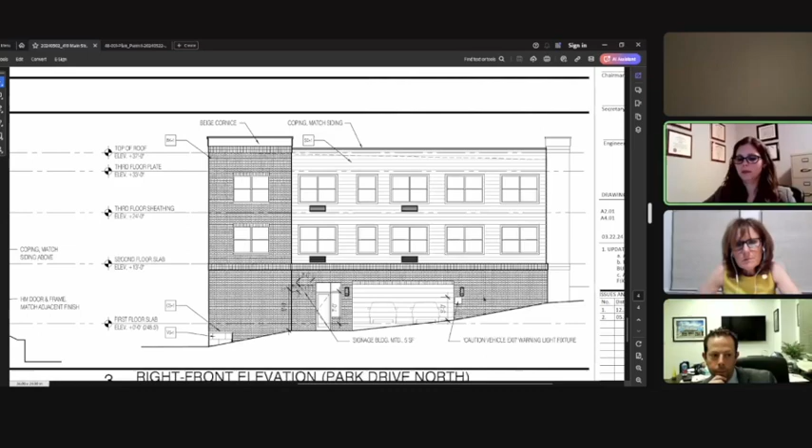And that's as well as for the regular door that you would come in as a pedestrian, right? Yes, all the doors will be locked and with a key fob system, so you'd have to have that for access. And the owner operator will also have access cameras around the entire building and in the garage. Correct, yes. That concludes the testimony I have, unless you have any other questions for me, Mr. Tavell.

No, I think we're good. I wanted to make sure that any of the items set forth in the CME letter that relate to architecture, that you perhaps may have missed, you'll agree to comply with, correct? Yes, we will comply. All right, Mr. Chairman and members of the board, obviously the other witnesses will address the other comments set forth in the letter. So I turn it back to you, Mr. Chairman. Thank you.

Yeah, while we're waiting, just one other item, I guess, too, that Brittany, you just might not, Harold will cover this as well, our traffic engineer, but we do have the requisite EV charging stations in the garage. Is that correct? That is correct, yes. Okay, just so we get that on the record. All right, thank you, Mr. Chairman.

Okay. Doug? Yes. Okay, good. Okay.

Okay, Vice Chairman Garino, do you have any questions? We'll be getting to traffic engineering shortly, won't we, Mr. Chairman? Mr. Toy? I believe so. Mr. Tuvell, are we getting into traffic engineering? Yeah, I was going to, because the architect already explained the ground floor plan and circulation, I was going to go to the traffic engineer next to expand on that a little further. That's fine. Okay, we'll get there. Thank you. Okay, Mayor McCartney, do you have any questions?

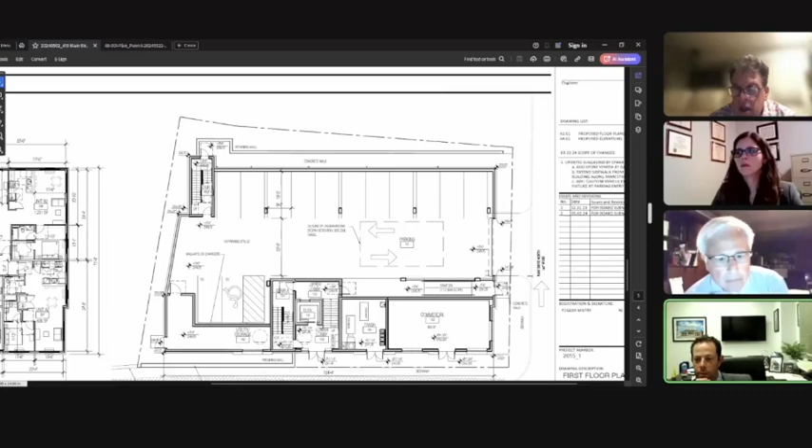I recall now. Mr. Chairman, I don't know if Mr. Klein is trying to talk, but he's on mute. Mr. Klein, you're on mute, a couple times. No, Jason, that's my thing, I like to make faces and I get in trouble for it. Up to you, it's okay. I'll do both, I'll mute and I'll.

Okay, I'm sorry, I'm going back to my notes. So I still have the microphone, is that right, Mr. Chair? I'm sorry, we have 12 units in this property.

And is it 12 or 13 parking spaces? There are 13, and they're going to be addressed in more detail by the traffic engineer. So I only see 12 on your plan. Oh, I do see 13. Okay, one handicap and 12 regular parking spaces. That's correct, Council President.

So at the far end of the building, where the handicap parking spot is, there are 2 spots. Is that enough radius for the parked car that would not be in the handicap spot to back out if a car was in the handicap spot? Do we know what that kind of radius required is for that? That will be answered by the civil engineer.

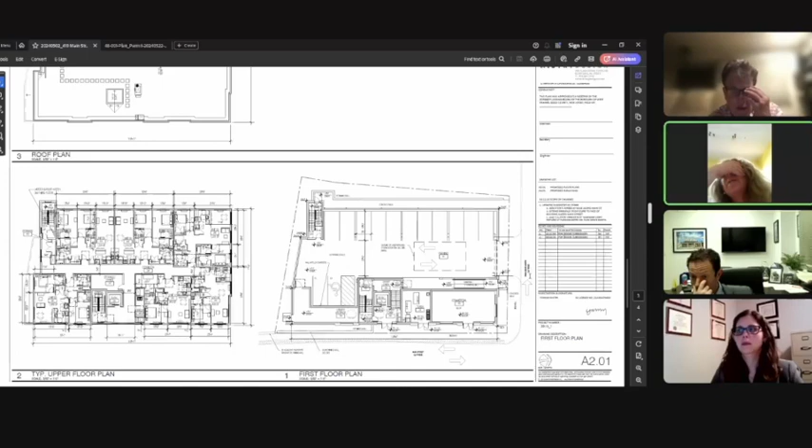So then again, with the traffic engineer, if there is a variance for parking, then where would the parking be available for the retail space? I think we have to wait for the traffic engineer for all of that.

One more question, just curious. Has there been any consideration about going taller with this building? I understand it would be a variance, but would that provide additional parking if the building were proposed to be taller? I don't believe so within this footprint. It would be difficult to get a ramp for additional levels. All right, thank you. You're welcome.

I'm sorry if I missed it, did you talk about the materials? Is it going to be real brick or just brick face? Is it going to be hardy board or something like that? Did you talk about the materials? Sure, I'll go back to that.

Yes, I'm sorry. I'll start at the bottom and work my way up. So at the bottom, we have a stone veneer, which was added at the recommendation of SPRAB. Then we have full brick for the majority of the first floor, and brick continues up in select areas, all full brick, no thin brick. Then we have lap siding and composite trim at the windows, and a beige cornice at the top of the brick portions.

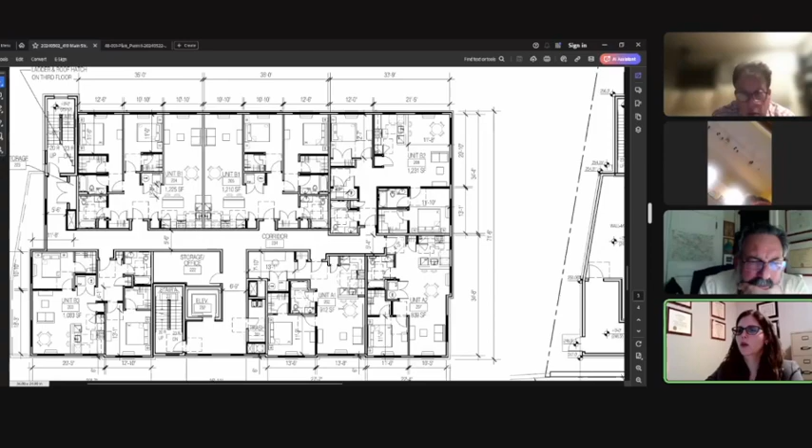Okay, can you go back to a floor plan that shows, I guess it's either a 1-bedroom with a den or something that shows a den? Sure, so there are only two units that have the den, and it is this unit 202, as well as on the third floor, it will be unit 302. So I can walk you through the plan, I'll zoom in a little bit more.

So the den has no windows? The den is 7'10" by 13'1", and it does not have a doorway, it has a larger than 5-foot opening. All right, so that really couldn't be made into a bedroom, certainly not legally. Correct.

Mr. Chairman, can I just go back to one of the questions that the mayor had regarding the height? That's okay, go right ahead. Mr. Klein, are you done? Oh, sorry, yeah, I'm done, I'm finished. Yeah, go right ahead, I just wanted to address it so we're on the same page there.

So the maximum height permitted in the zone is 35 feet. We're at 34.4. The most we could go is 38.5 feet without it going to the board of adjustment, because of the 10% requirement. We could evaluate it, but the only wiggle room we would have and still stay at this board is approximately 4 feet, roughly 4 feet.

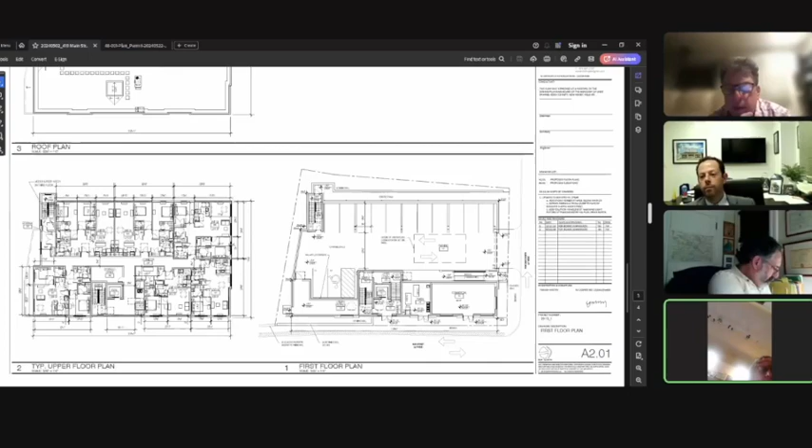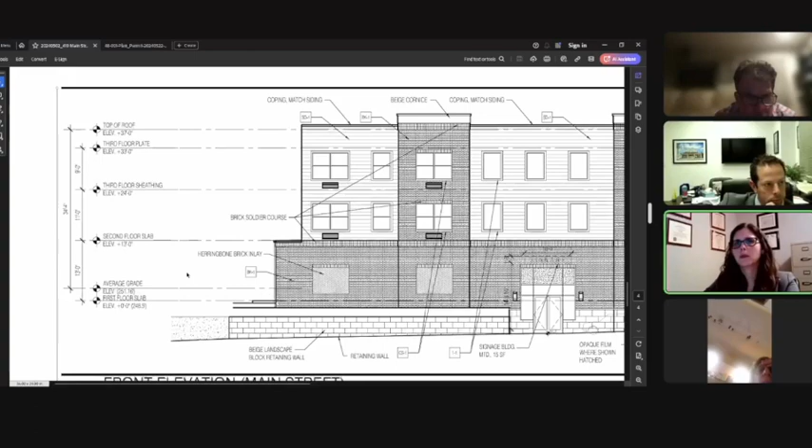Thank you, Mr. Duda. Where are you measuring the building from? Average grade, let me show you here. On the Main Street elevation, you can see average grade is at 251.16 feet, and then the top of roof is 37 feet above the first floor slab. Actually, no, it's above that, for a total of 34 foot 4 inches. So you're measuring the average, but I'm looking at your lines and the average grade is higher. I'm sorry, it's around the whole building.

Eventually I'm going to ask Mr. Hess to tell us what the ordinance is, because we have a specific way of measuring. I know we've gone through this before, I want to hear what Mr. Hess has to say, but okay, keep going. That's done in coordination with the civil engineer who follows the town ordinances as far as how the average grade is determined, because sometimes it is right at the property line, sometimes it's 10 feet out. I'm not arguing, that's what I want to hear from our expert. That's okay, thank you.

Mrs. Moraldo: Yes, Chairman. Going back, you stated earlier that everything's going to be in compliance with the fire code. The garage, you said sprinklers - is that going to be a wet system or a dry system? Is there going to be heat in there?

Presumably inside the garage will be a dry system. There will be heat in the ceiling for the underside of the structure above to keep the plumbing that comes through from freezing. But I believe the system in the garage is usually dry. The entire building is sprinklered, not just the parking.

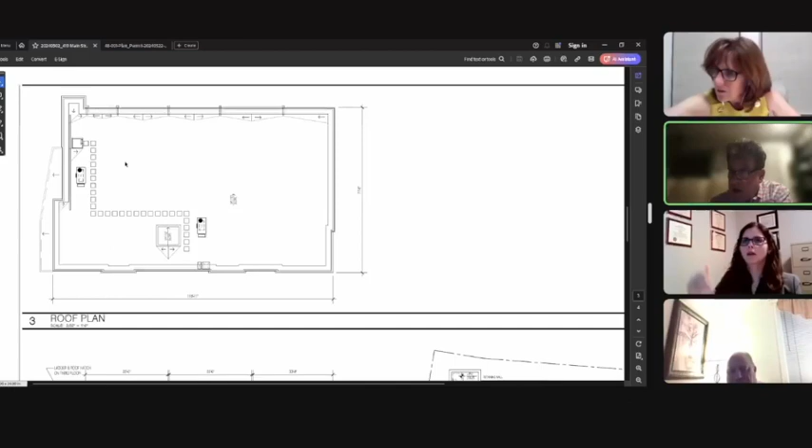Can I just piggyback on the scuttle, Mr. Klein - so if you do have a real stairwell there, are you going to see that from the neighbor's side? Like if that thing was in the middle of the roof it wouldn't be a problem, but it's all the way to the side where there's a neighbor.

I don't know what the elevation is. Are they going to see that protrusion on the roof? Yeah, I would think they would. I don't know, height-wise, if they're above it or below it. I can't tell. But I defer to safety over the neighbor's aesthetics.

My question was going to be, is there a way to move it further in? But that's going to mess up the floor plan, looking below at it. I don't think so, unless they want to. I'm trying to get within code, we'll make sure we're preventing issues. You'll dress it up to make it look like whatever, whether it's brick or siding.

Okay. Mr. Morgan? No questions at this time. Thank you, sir. Mr. Cardoza? Yes, thank you, Mr. Chairman.

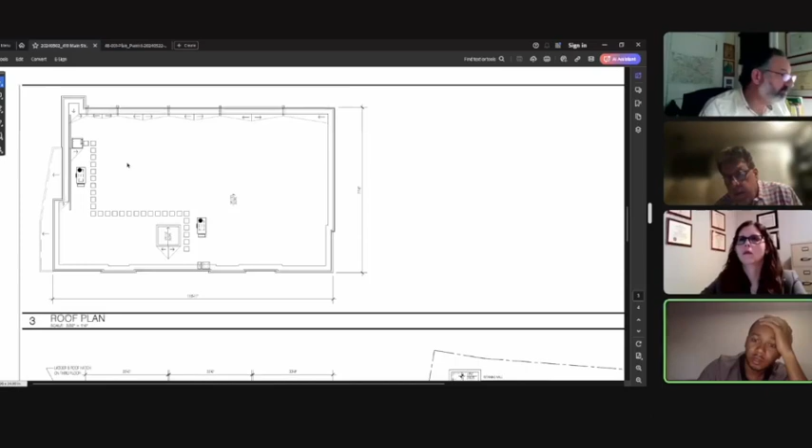Ms. Klim, can we start with the first floor? Looking at the commercial space, there's no restroom there? The commercial space is not designed at this time, but it will have a restroom. I assume we'll probably show rough-in for it at the time of construction documents, if this moves forward. We would usually provide for a space of 900 square feet, and we would usually provide one toilet room.

Looking at the trash room, the only entry, point of ingress and egress, is the one door on the street, right? Correct. The entrance from Park Drive North, the doorway, so there's a ramp and it connects to the stairwell halfway up, coming up from the first floor. That's correct. Yes, I just want to clarify everything I'm saying.

I'm looking at two different stairwells, I see the main lobby stairwell and another stair A. Can you clarify? So there's an open stair within the lobby that has 13 risers. Then within stairwell A, we have 13 risers from the lower lobby to the upper lobby, but within the stairwell. I'm trying to envision this going up, do both continue to the third floor? The open stair in the lobby terminates at the lower lobby and the upper lobby. The stairwell continues up over here, where it terminates. Stair A continues over here.

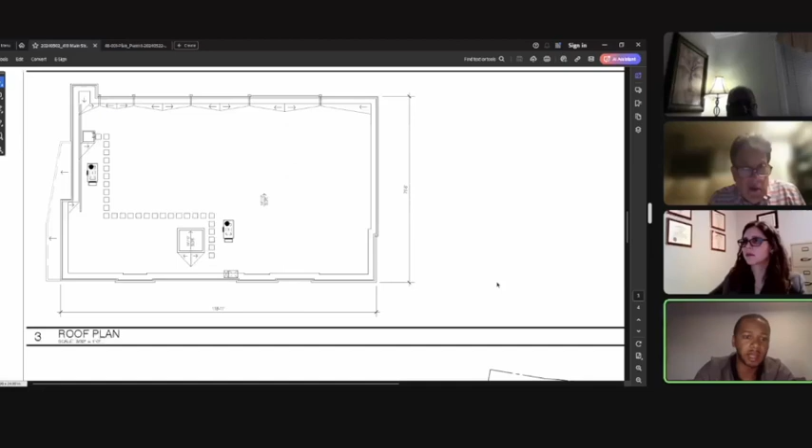Sorry, I'm having trouble. What were these two units? I don't know what I'm looking at. Is this like a brick? What is that path, and what are those?

The paths are walking paths, typically on a TPO or EPDM roof to prevent damage to the roof surface. Over here we have the elevator penthouse, which protrudes through the roof a few feet. To the right, I have a rooftop unit, and back here, the roof hatch as well as a second rooftop unit.

Okay, when you say rooftop unit, you're talking about a mechanical? That's correct, yes, an HVAC system. And when you say penthouse, are you talking about a skylight? No, the elevator shaft requires a higher ceiling height than the rest of the floor, usually somewhere around 12 feet because of the system on top of the elevator shaft. Okay, understood, but it will be fully screened.

Understood. And the parapets that surround the top floor here, the roof, how tall is it? I don't have that exact measurement, but they'll come up a few feet. Okay, so then it's pretty clear the roof is not meant for residential use, it's purely for management and maintenance. That's correct, yes. And not much maintenance is required on the roof.

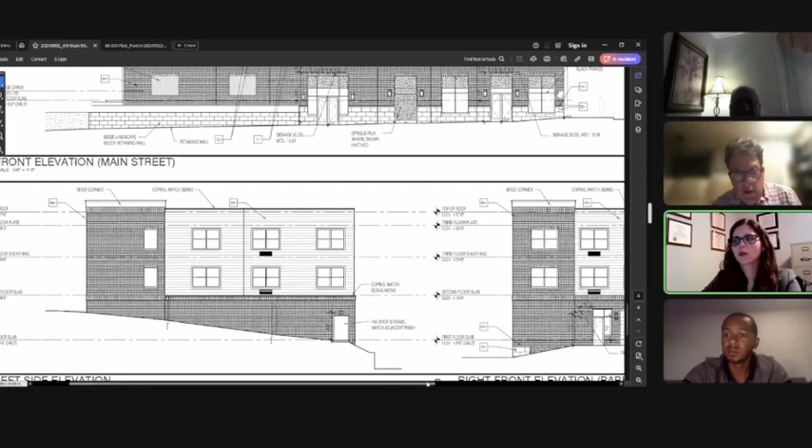Can you zoom out again, I'm just trying to make sure I recall everything here. All right, I suppose that's it for now. Thank you, Ms. Clem. Thank you, Mr. Chairman. Thank you, Mr. Cardozo. Ms. Capper, do you have any questions? No questions right now, thank you. Thank you, Ms. Capper. Mr. Hess, do you have any questions?

Thank you, Mr. Chairman, I have two things. First, you had asked about the definition of building height. The building height is measured from the mean ground elevation surrounding the building to the highest point of the roof, based on the definitions in the ordinance book. Okay, so do you agree with their measurement? I had not checked it. Normally that's something the planner looks at, because that's a variance issue, but I could take a look at it and see if I agree.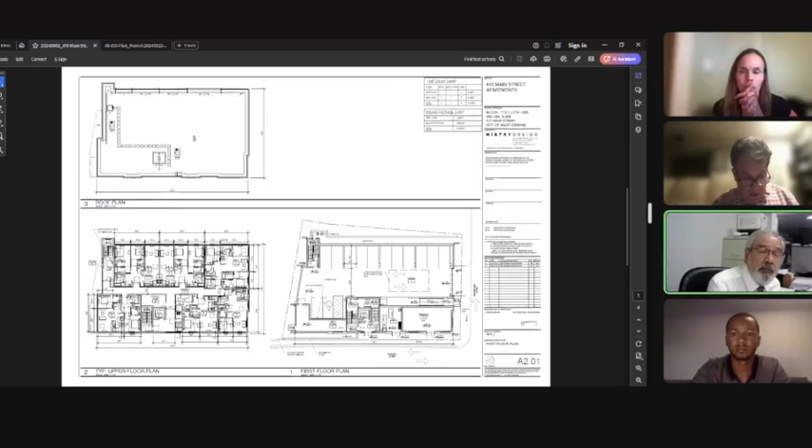And the second question relates to the units, the 1-bedroom units with the dens. I think you had said earlier that it wasn't big enough to become a bedroom. Yes. But the question I had is when I look at the dimensions, it shows it being 7 foot 10 inches by 13 foot 1 inch. I think that could be big enough to be a bedroom. My question is, how would you keep that from being converted to a bedroom? Would there be a deed restriction, or lease restrictions, or how would that be done?

Well, I testified to the dimensions and that there's a 5-foot entry to the den, which is an addition, so there is no 3-foot opening that you could simply add a door to. That is one element, and typically the fire department will check them on occasion, and that would also be within the lease, that you're not allowed to use it as a bedroom.

Okay, so that would be in the lease. I saw the 5 foot that you're talking about, but that's actually not included in the 13 foot 1 inch dimensions, so that would actually increase the overall length to 18 feet. No, 5 feet in the other direction, the entryway into that den is 5 feet, on this page, from top to bottom.

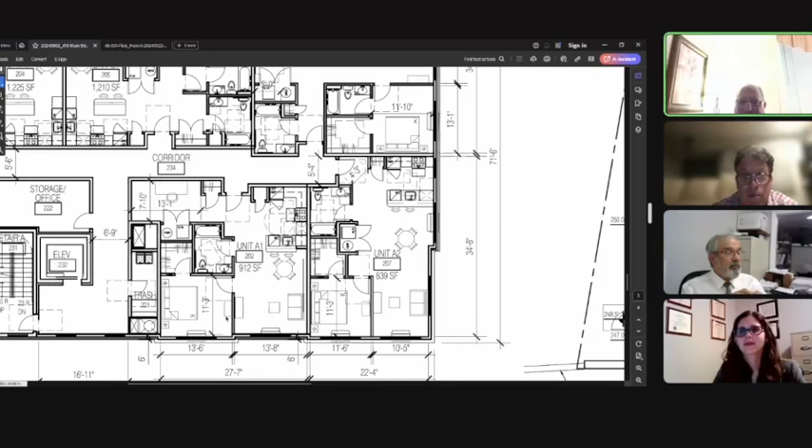While I have the floor, real quick about the elevators - is it large enough to handle a stretcher if there was an emergency? And the elevator shaft is concrete? It will either be concrete or concrete masonry units. Block.

And then what about the trash units - is that going to be cement, concrete also, or wood framed? Are you talking about the chute? Yeah, the trash chutes, yes. The chute is usually constructed of shaft wall, which is the CH channel, and one layer of 1 inch gyp. They're 2-hour rated. Will there be sprinklers in there? Yes. Thank you, sorry for the interruption.

Welcome, Ms. Kaffer. I don't have any questions at this time. I think Mr. Cardoza has- Mr. Hazel.

Just a couple things. In terms of the height, as indicated, based on the methodology that was employed to get this height, that is sound. Basically, it's taking the height from the average grade as calculated on all sides, so that methodology is accurate. Great, thank you.

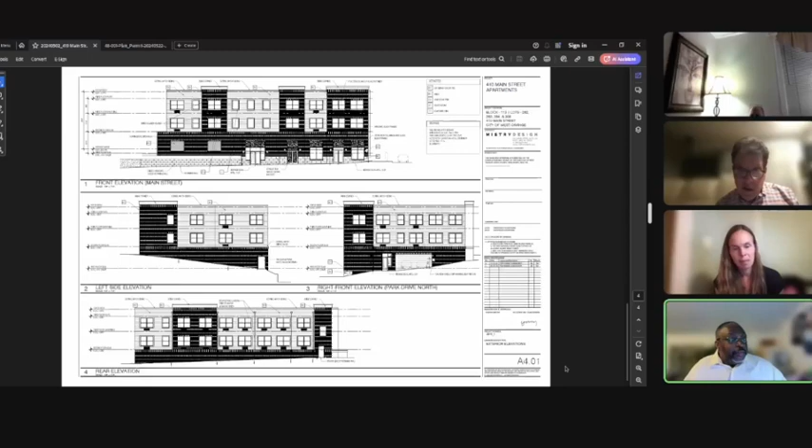I had another question about the front of the building. Just looking at your rendering, the area where you're talking about having the glass opaque, did you consider possibly doing some sort of a canopy that would extend out to shield that view from the sidewalk and street frontage? An awning, yes, we have talked about it. It is something we could do if the board was favorable to it. I think it will help in dressing up the front a little bit, make it look a little more - I think that's all I have for now.

I'm not sure, I should really look into the permissiveness of this within the city ordinances, but did you look at the parking - I noticed up the street there's quite a bit of parking for the apartment buildings, and I'm not sure how much that's used, if it's basically at capacity or if there's a lot of empty spaces throughout the day. Did you look at the possibility of shared parking space in any of those surrounding properties? I'd have to ask the client or the traffic expert on that - Brittany wouldn't have been the one to look into that. But it's a fair point, and we'll take a look at it.

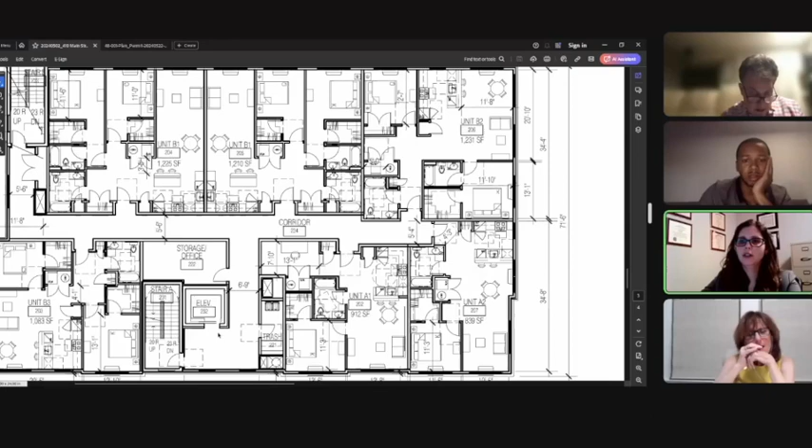Thank you, Ms. Klim, can I follow up on the elevator? I'm looking at the second floor plan. Sorry to beat a dead horse - you mentioned that the elevator opens in the front and the rear on which floor? The second floor. It's residential, it has one entrance on, we'll call it the front of the elevator. And that would be the third floor as well? Right. And then on the ground level, that same entrance will be available at the lower lobby, but the upper lobby is 7 feet, 1.25 inches higher. So you go up these 13 risers and you land 7 feet higher.

And this elevator will have a rear entry as well. You'll be able to exit or enter the elevator at that level. For example, if you had a handicap user here, they could come through the door, take the elevator down, access the mailbox, go back into the elevator and go up to their unit. If someone came in through the front door, they could go into the elevator, come through to the upper lobby, or continue up to the floors above.

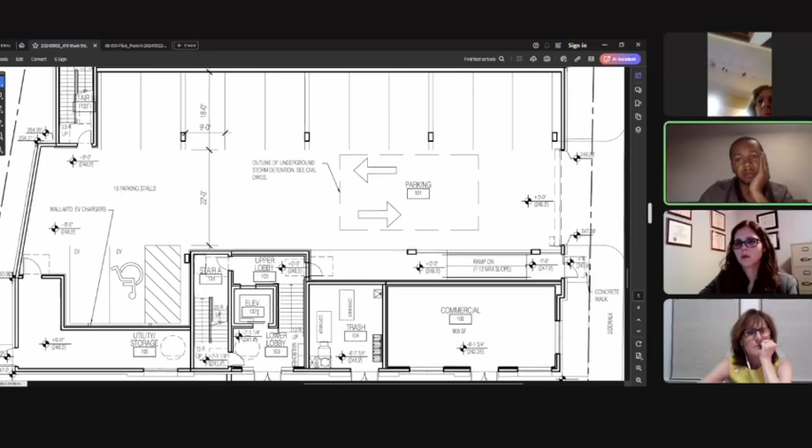Since you mentioned that, the entrance to the upper lobby from the garage, and from the walkway, the ramp, the street - is that level with the garage? So are you talking about this entry? Where's that, on the side, on Park Drive North? Oh sorry, I think I'm enlarged. So from there to the upper lobby, the door to the upper lobby, you're saying that is level with the garage? Yes. Okay.

All right, so then looking at the second floor again, the elevator - that's the same, same thing for the third floor, and the office/storage, same thing for the third floor? Correct, yes. So perfect, thank you.

You're welcome. For the renderings, it looks like a lot of green on both the rear and on the side. How much space are we talking about between the neighbors?

I think the civil engineer will get into the exact on that. I don't know if Mr... Yeah, you want me to answer that? Well, I think you could give a generic answer for Mr. Cardoza. In the rear, Brittany, it ranges from 8.16 feet, I believe, to about 12 feet in the rear, correct?

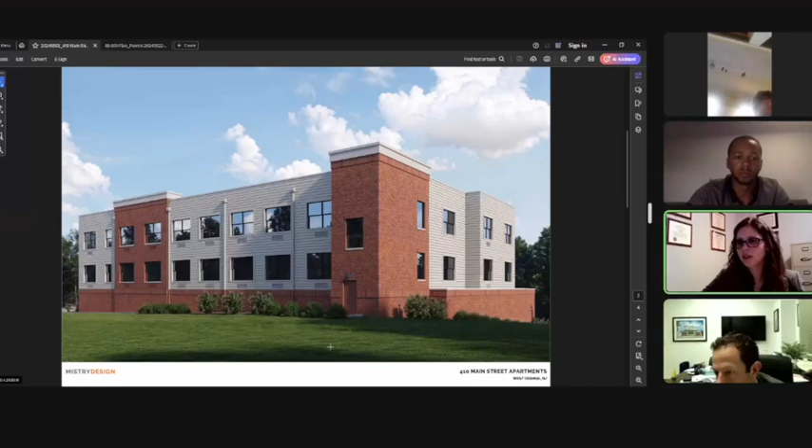Yes, 8.1, sorry - 8.16 in the corner over here where the property narrows down, and then back here where the stair is, I think you said 12. Yeah, it looks like, sorry, it probably goes 12.32 feet from this edge of the stair tower to the property line. And you are correct, this grass would be smaller because, in fact, there is another building here. Right. And then on the other side...

I don't know, in the front this is the accurate landscaping. I guess there's artistic license with the trees - maybe there's a few less trees in reality on the adjacent properties, but the landscaping shown is as true to the landscaping plan that is proposed within the civil set.

Understood, I meant the other edge - I don't know what to call it, I'm going to say the left, but back here. Yeah, between that end of the building and the neighbors on that side, how much space roughly? Yes, I think we're going to have some greenery on top of this retaining wall, which will be discussed with the landscape plan, and the adjacent property here, I believe, has some landscaping in the front as well.

Do you know the distance? I do not have the distance at this exact corner, but a little further back where it's tighter, it's 5.22 feet. Oh okay, so it's really... So it's a little wider at that corner, maybe somewhere around 6 or 7 feet. Okay.

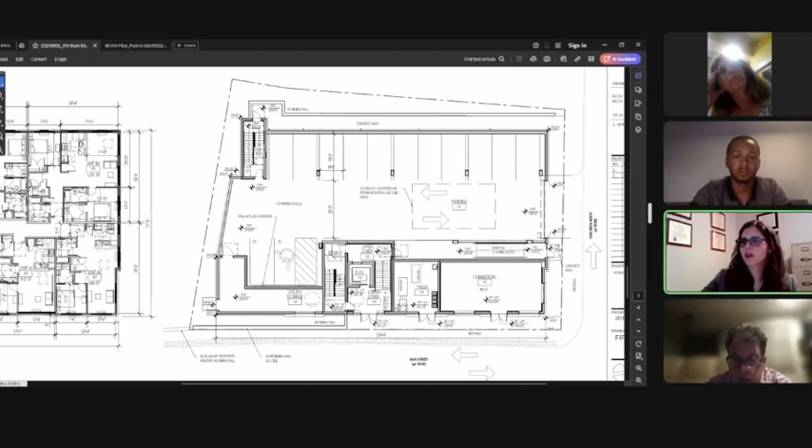What I can answer on that is that the retaining wall on the existing property used to go all the way to the property line, and we have brought it back 5 feet to the face of the building. We actually had proposed mulch or grass in between the doorways, and based on our review with SPRAB, we extended the sidewalk up against the building. I know it will be addressed more thoroughly in civil. Sorry to keep giving that answer.

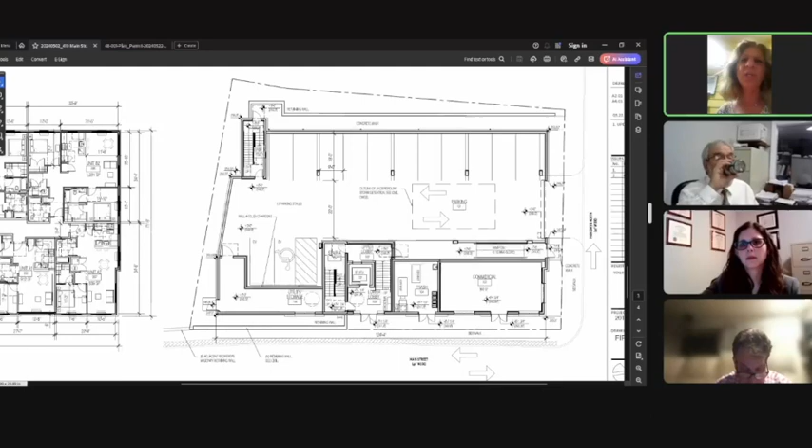All right, thank you. And I wanted to thank Mr. Hazel for bringing up the idea about the canopy, because along our Main Street corridor, we have a Thomas Edison National Historic Park. We recently designated Trinity Church as a historic site. We have Our Lady of Lourdes Church, over 100 years old, Washington Street School, over 100 years old. And again, this building where Mr. Hazel had mentioned canopies, any way to dress this up to make it look more classic or not an institution? That would be my question.

And my question is about the trash room. If the trash room is going to be accessible for all units, will there be a private hauler, and how will they access all of the trash in that trash room? Yeah, Brittany, can you just reiterate that so it's clear?

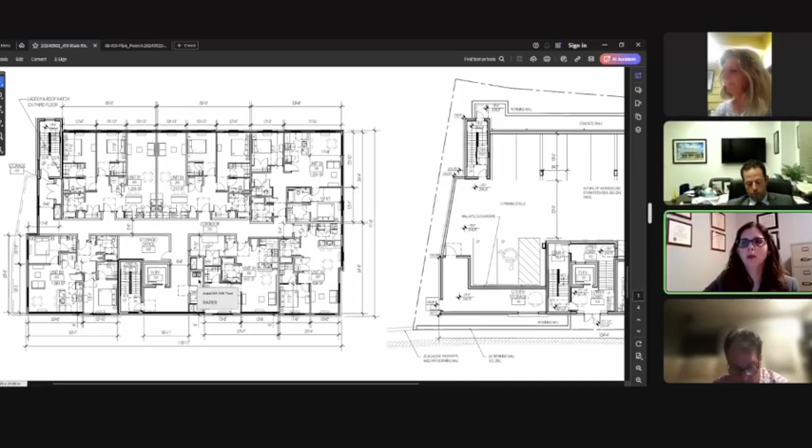Sure, yes. So the tenants will have access to the trash collection room on each upper floor. They will use a trash chute, and their bags of trash will go down the chute and land in the trash termination room on the ground floor. There will also be recycle bins in that trash room on each floor that tenants will fill, and the maintenance personnel will bring those recycle bins down, most likely via the elevator, down to the trash room on a regular schedule, and it will all collect down in the trash room.

I stated that trash pickup will be by private hauler coming along Main Street, and the maintenance personnel will facilitate the removal of the containers into the bin. They will not be sitting and waiting on the curb. Okay, thank you. Does that answer fully? Yes, thank you.

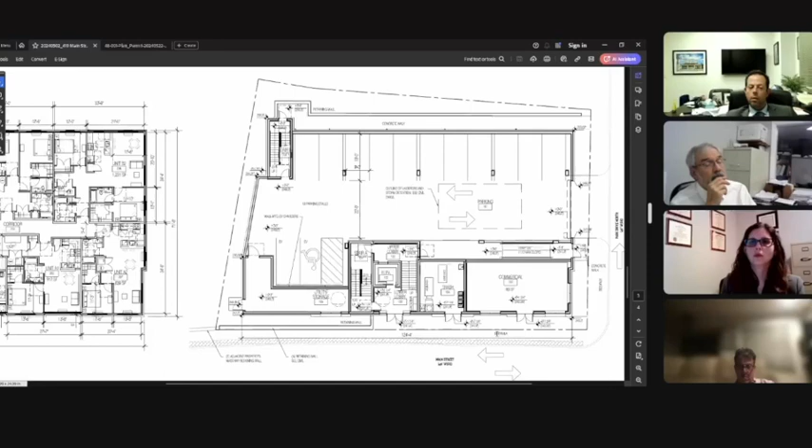No, Mr. Council President, I'll reiterate, I thought we were clear, so I apologize if it wasn't clear. So in the trash room on each floor, the resident will bring their trash, like you would put your trash in the garbage, and then there'll be a separate bin for recycling that the residents will put bottles and cans and cardboard and stuff like that. And then the building management will take the cardboard or recycling items from each floor, bring them into the trash room on the first floor, put them in a separate recycling bin that the private hauler will take when they come to pick up.

Got it, I didn't hear that earlier. No problem, yeah, no problem, no worries. With regard to the EV stations in the garage, it looks like there are two. Is that right? There are two electric vehicle charging stations? That's correct, because we have to have the ADA space also have the ability to have an EV charger. Got it, and do we know what type of chargers they will be?

No, that's usually spec'd out later. I think we have to run the conduit and show it there, but the actual charger, I don't believe that's picked out till construction.

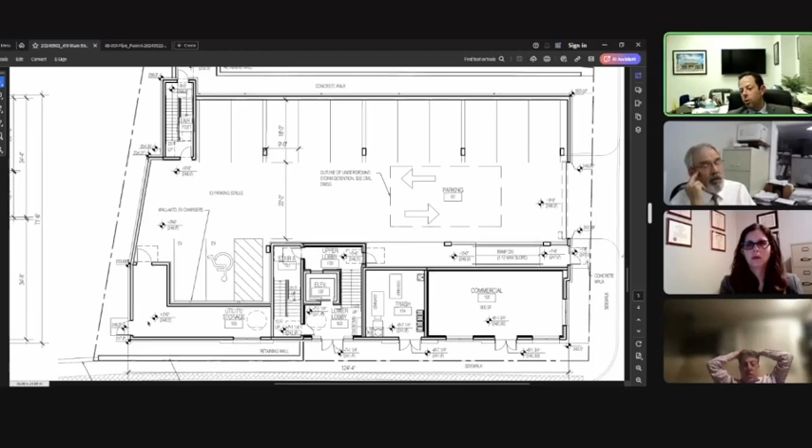Got it. So essentially there will be one electric vehicle charging station for non-ADA residents. The way the statute sets it up, based on the number of units here, we only need one regular EV charger and one ADA charger. But we could avoid having multiple chargers by having one structure with two outlets, so it doesn't take up as much room.

So if there are multiple EV vehicles in the garage, that EV space can't be designated for a resident, it's only a space to charge and then put your car back where it needs to be. So somebody with an EV would just get that space to charge, and if there were more than one EV car in the building...

If more than one person has an electric vehicle, one of two things can occur. I've seen it where you just leave it as is per state code, or you can pre-wire some of the other areas in the building for flexibility to run an EV charger in the future if tenants require it.

Got it, alright. My last question is more of a comment, picking up on what Mr. Hazel said earlier. In the rendering showing the corner of Park Drive North and Main Street, there are no cars shown parked on the street below the garage, but as it is now, there are cars parked there. I don't know our ordinance regarding parking there, but if the desire is no parking, that might require a change in the parking rules on Park Drive North.

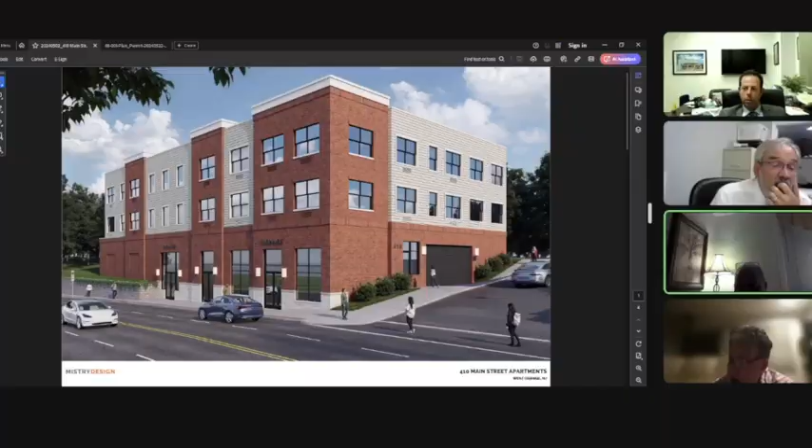Conferring quickly to answer Council President Rutherford's question - that rendering from the garage door down to Main Street, if that's within 50 feet of the corner, that's prohibited parking anyway under state law. Even on a one-way? I believe so, 50 feet - that's what the police chief told me. I can confirm, but I'm pretty sure it's 50 feet from a stop sign, 25 from a crosswalk. Yeah, there's a crosswalk there. I think he knows a little better - it's 25 from a crosswalk. As you go up that block, I was there today, there's no parking on that side of the street, all the parking is on the opposite side.